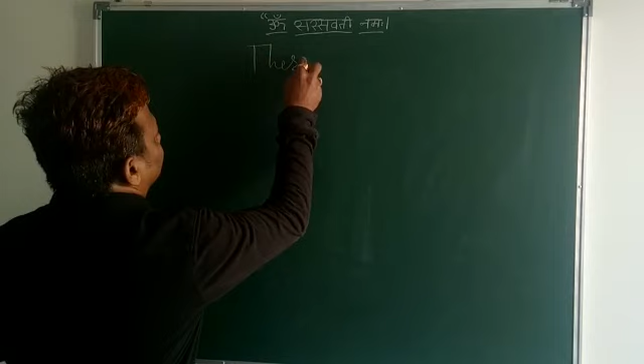Hello my dear children. Today I am going to discuss with you a very important topic in our physical chemistry part, that will be thermodynamics.

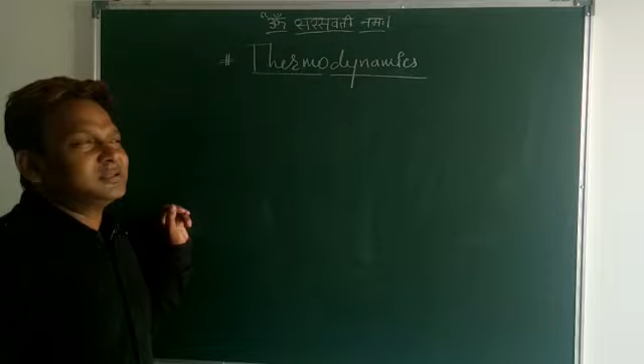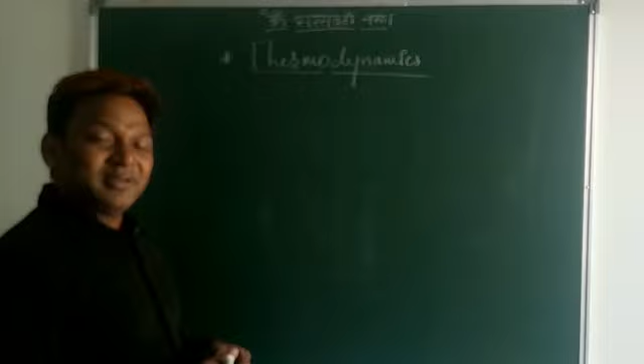And this thermodynamics we are going to learn in our chemistry, because everybody knows that thermodynamics in physics and in chemistry is somewhat different. If we are talking about thermodynamics in chemistry, we have to consider from system to surrounding. But if we are discussing thermodynamics in physics, we have to discuss it from surrounding to system. Some notation gets changed. So we are going to discuss this thermodynamics in our chemistry.

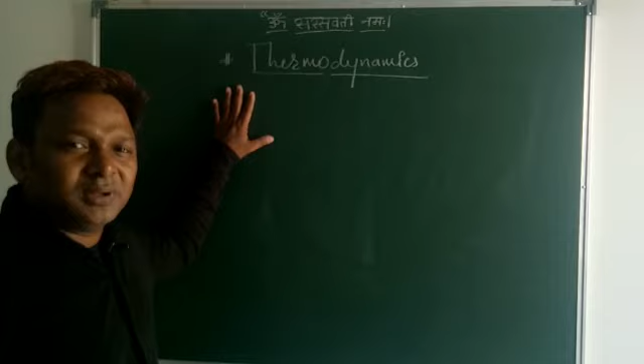And I want to cover all the parts, whatever is asked in this thermodynamics chapter, in IIT Mains, Advanced, even in NEET. So we are going to discuss about thermodynamics.

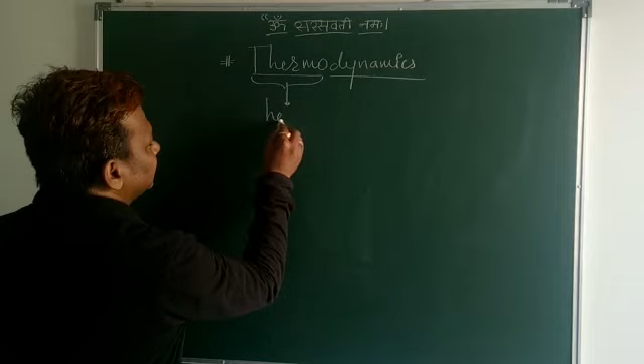First of all, this term thermo, if you want to check, this will be called as heat. Term dynamics, this dynamics means it will indicate movement, so motion. So motion of heat, movement of heat, also we can say this is called as movement of heat.

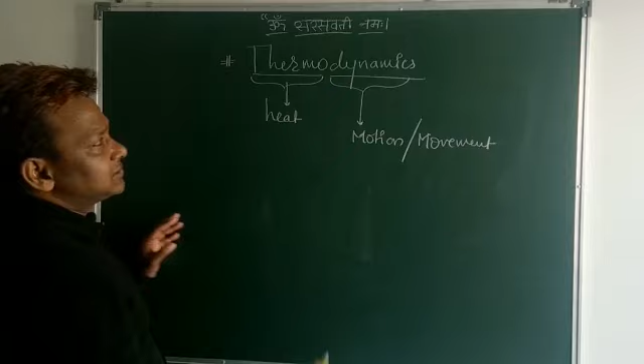Now this movement of heat, either it will take place from one part to other part and from other part to one part. So this exchange of heat, movement of heat, we are going to discuss in this chapter. To understand this chapter, some principal terms are there, some important terms related with this chapter.

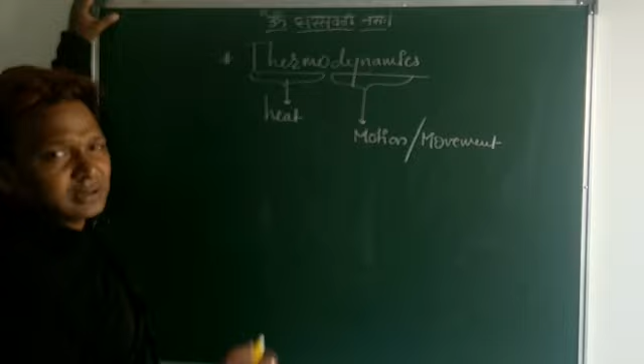And that will be called system. This is one of the most important parts, and the second important part in this chapter we are going to learn about is surroundings. So what is a system and what is a surrounding?

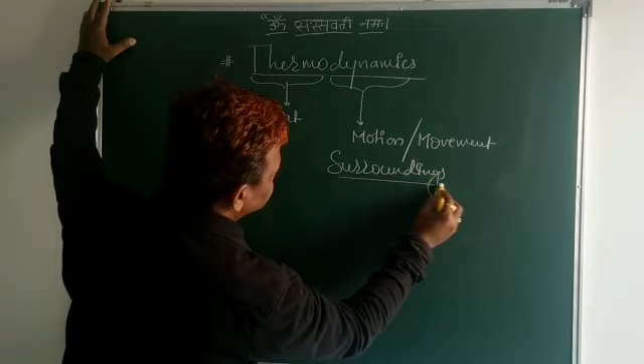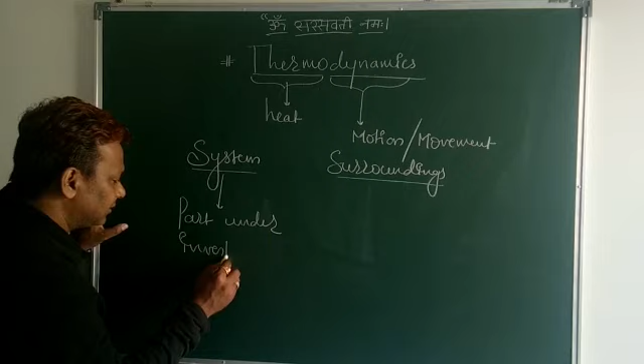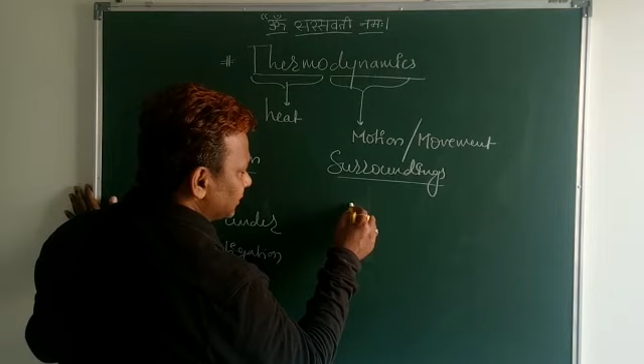Here, any part which is under investigation, the part which is under investigation is called a system, and other than the system, the part other than the system is called the surrounding. So I should say, a part other than the system is called a surrounding.

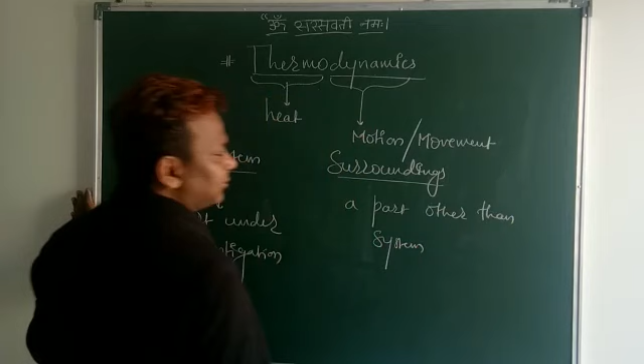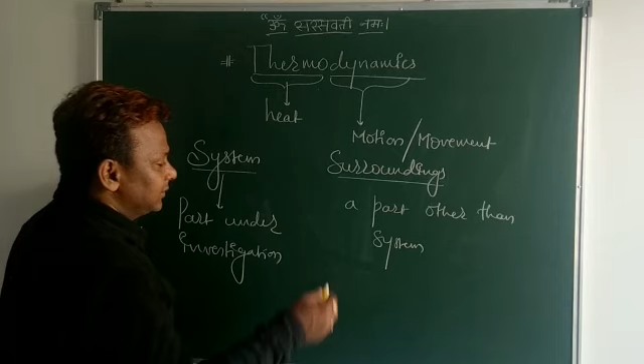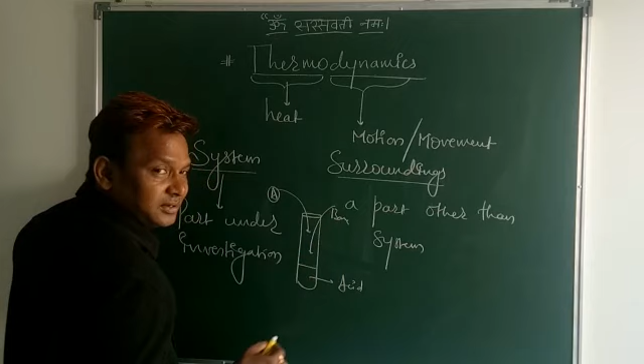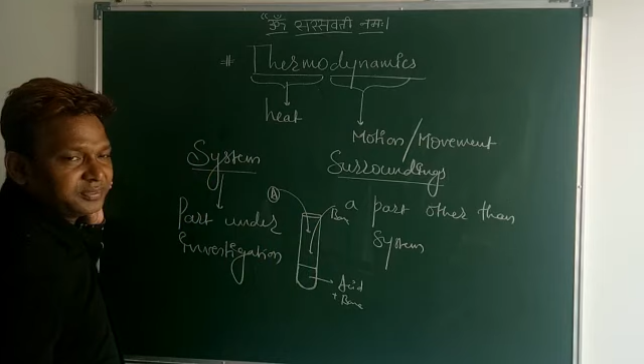I want to give some examples for this particular system and surrounding. Consider that we are in the lab performing some experiments, a chemistry lab. So we are considering a test tube, and in this test tube we have kept some chemicals. Let us say we kept acid, and we are putting in a base. Now reaction is taking place between acid and base and it forms salt and water. So what we are going to see is the reaction which is taking place inside the test tube.

So this complete test tube is the system for us, because it is the part under investigation. Means completely, the test tube is the part which is under investigation. So this will be considered as a system.

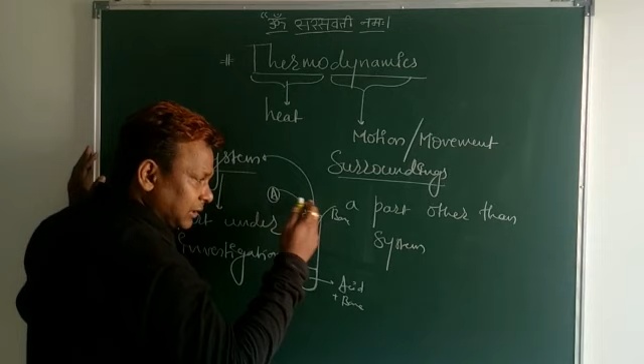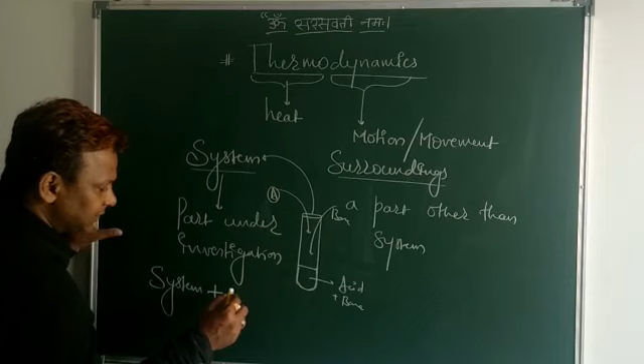But other than this test tube, the remaining part, meaning the complete part of the lab or that building, or that complete universe we can say, other than this test tube, the remaining all part becomes the surrounding. So one more very important point here: system plus surrounding makes it the universe.

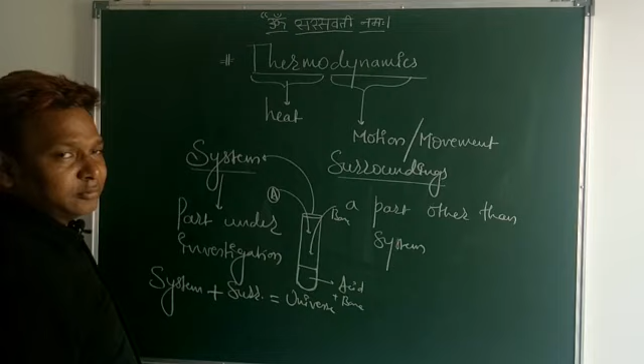One more example we can consider, instead of the lab. Suppose we are doing some work, let us say, I am doing work on the board. So this complete board is under investigation, so I will consider this board as a system, but other than this board, the remaining whole part becomes the surrounding. So it is a simple way to understand system and surrounding.

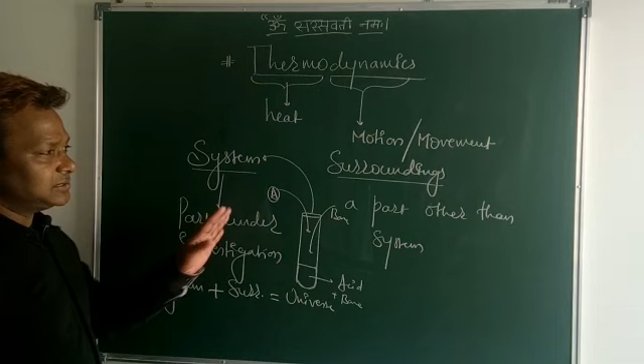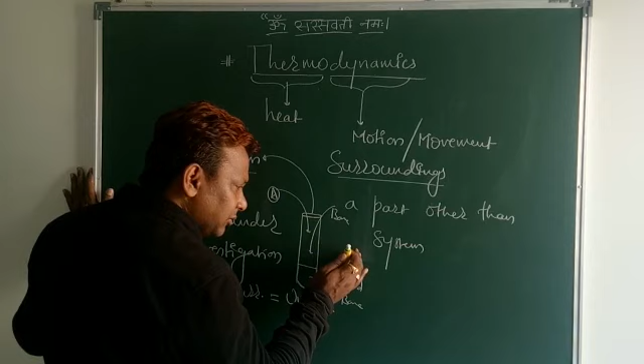But we know that if we are considering this test tube as a system and the other universe becomes a surrounding, then in between the test tube and the universe surrounding, we are having some kind of boundary. So all the system and the surrounding are having a kind of boundaries, and these boundaries are maybe either rigid, or real.

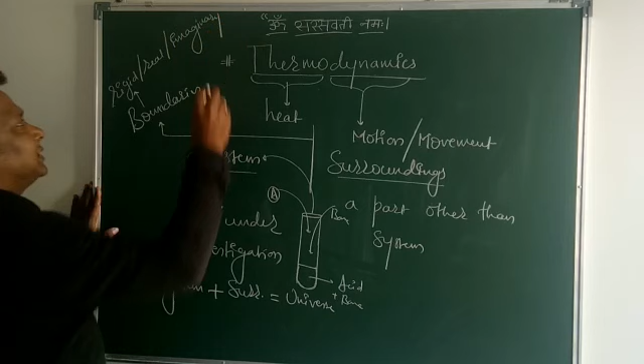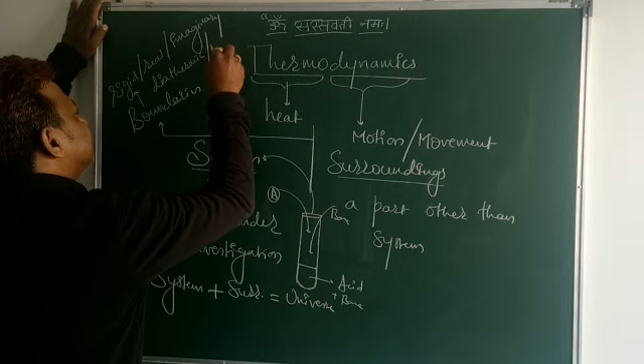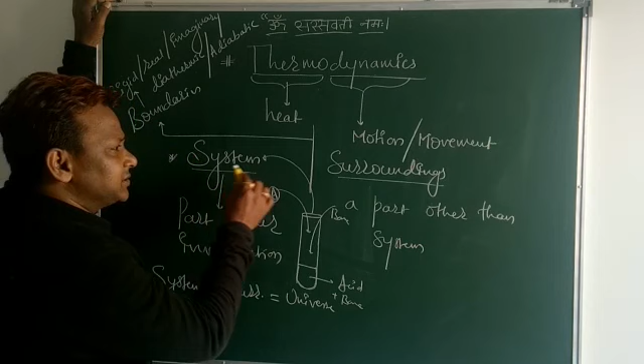Or it is imaginary, we can say rigid, real, imaginary, or it is diathermic, or it is adiabatic. So this is a very important point we are going to learn in this topic. The important terms are system and surrounding, and they should have a kind of boundary. This boundary may be a rigid boundary, real boundary, imaginary boundary, diathermic boundary, or adiabatic boundary.

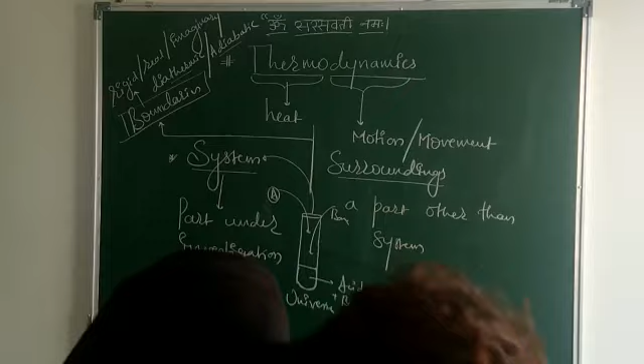What is meant by diathermic boundary and adiabatic boundary? The diathermic boundary means it is a boundary where exchange of heat will take place. I want to rub this part and explain this one. So these boundaries, if you are going to consider here as diathermic boundary, this is a very important term to remember again.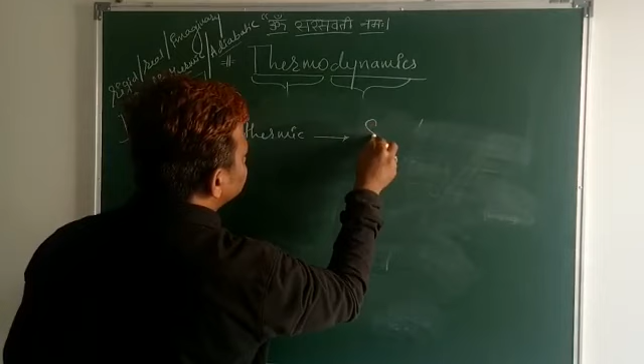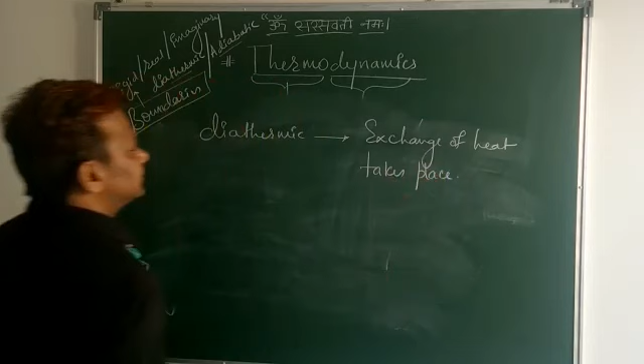Diathermic boundary means exchange of heat takes place. And adiabatic boundary means no exchange of heat takes place.

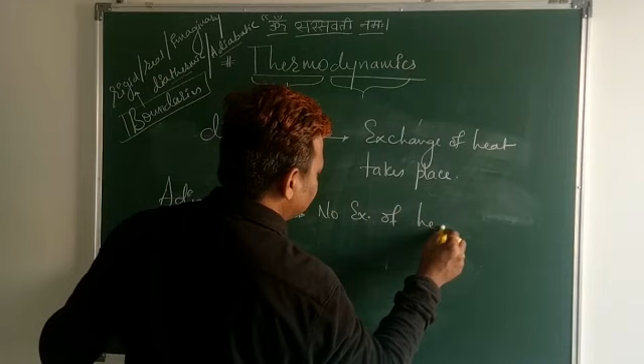So this is a point we have to remember. Boundaries may be diathermic or adiabatic. Diathermic is where exchange of heat takes place, and adiabatic is where exchange of heat does not take place.

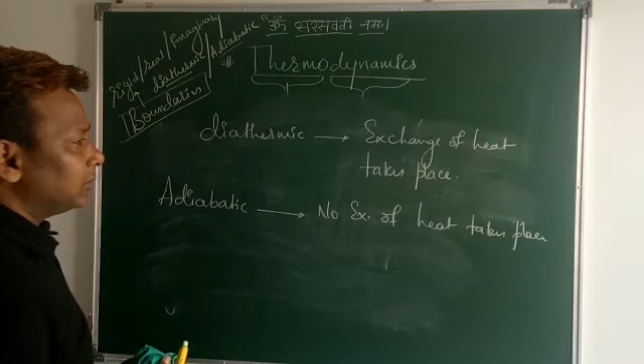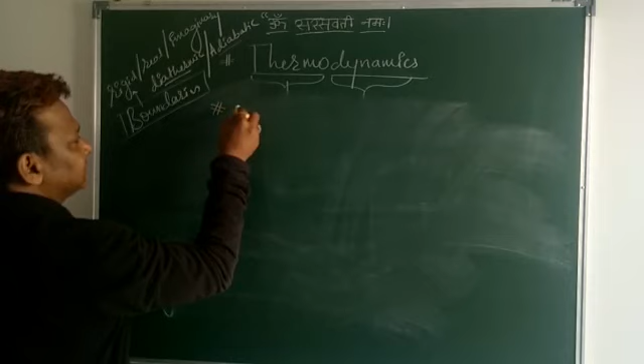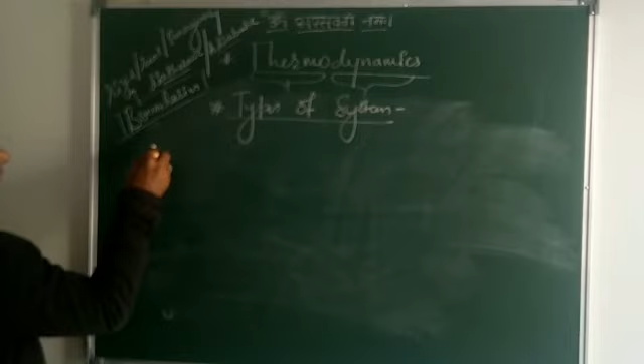So with this part about the system and surrounding, the further part we are going to see now is a system. So what is a system and what are the types of system? This is another topic in this chapter: types of system. These types of system are of three different types. The first one will be called an open system.

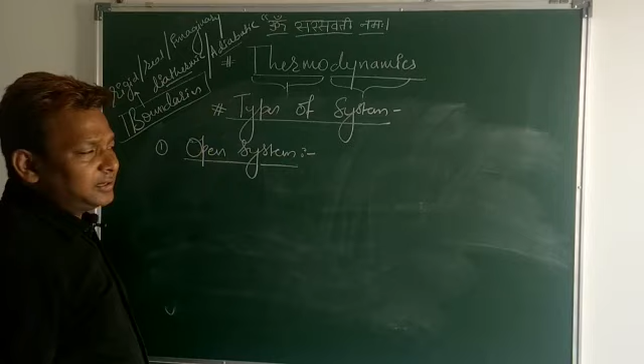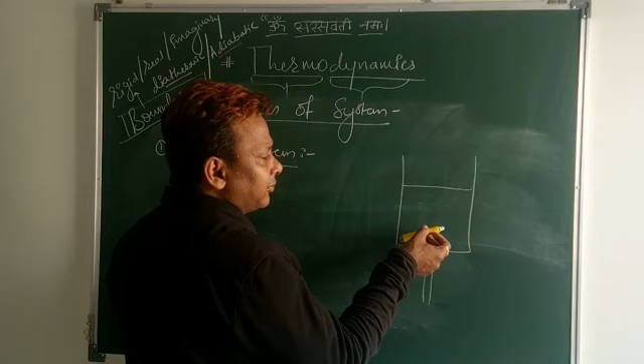Now I will tell you one example with a diagram. Suppose one vessel is there, and this vessel will contain water, and we are going to heat it. While heating, what will happen? Initially the water becomes warm. After some time, the water on the upper layer will start to evaporate. So in this system, what will happen here? Exchange of heat, that is energy, and exchange of mass, that is the water going to evaporate.

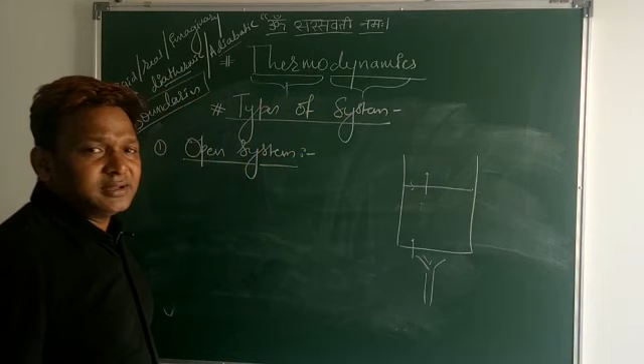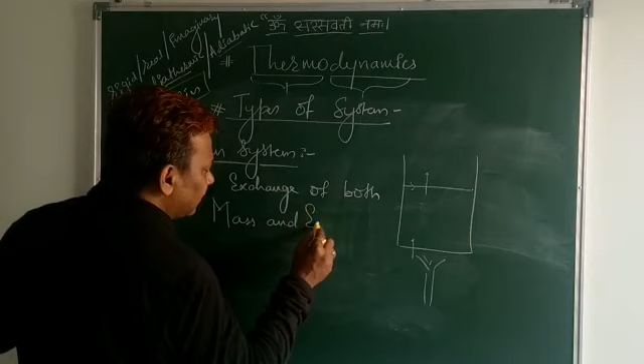So the system in which both means, I should say, the system in which exchange of both mass and energy takes place are called an open system.

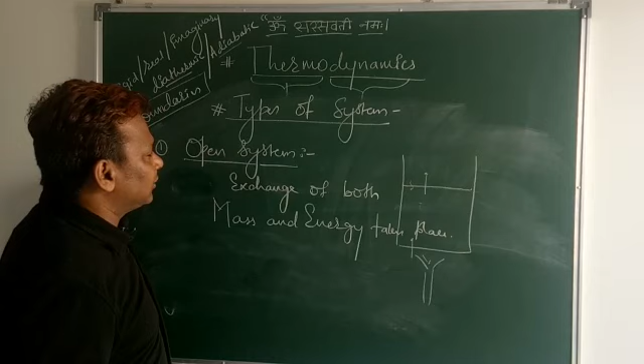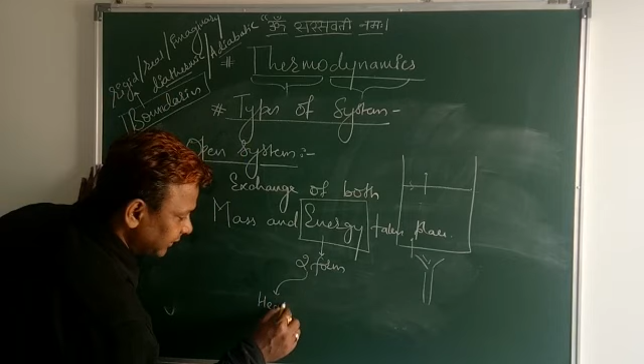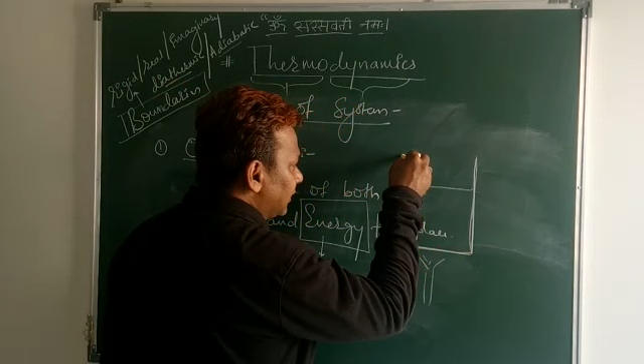But this point is very important. How does exchange of energy take place? Because exchange of energy will take place in two forms. The first important form will be called either a heat form or a work form. And for this exchange of mass and energy, the boundary which we are going to consider should be a diathermic boundary.

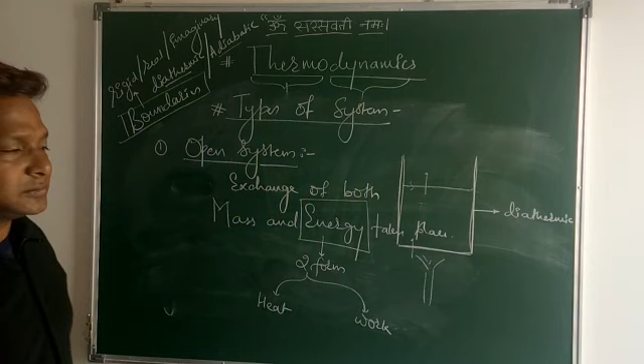If we are considering this boundary as diathermic, then only exchange of heat will take place. So it is a system in which exchange of both mass and energy takes place, and exchange of energy will take place in two forms. The first form is heat form and the other form is work form. So that will be called an open system.

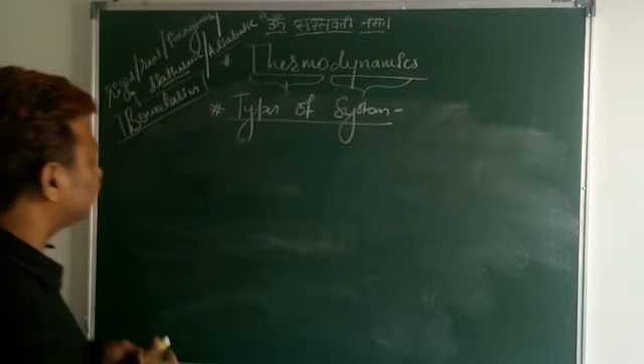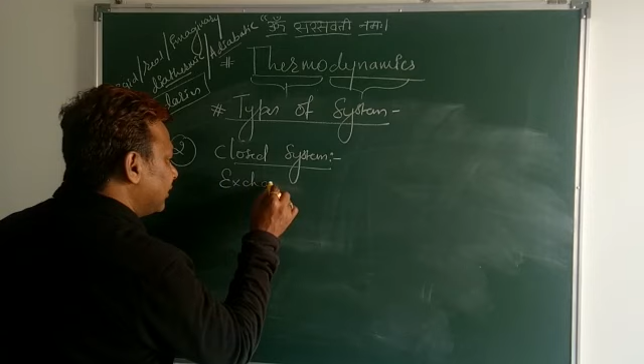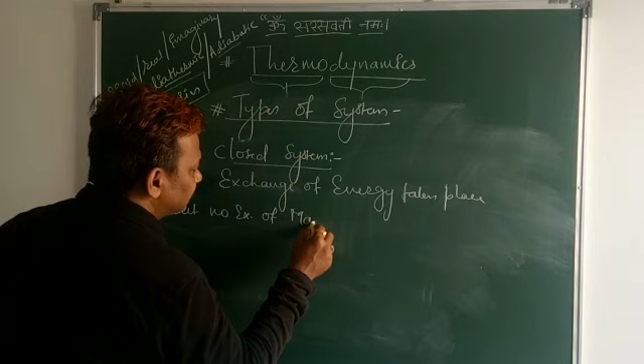The second part we are going to see is about a closed system. Now it is a system in which exchange of energy takes place, but no exchange of mass. Now let's go to an example of this closed system.

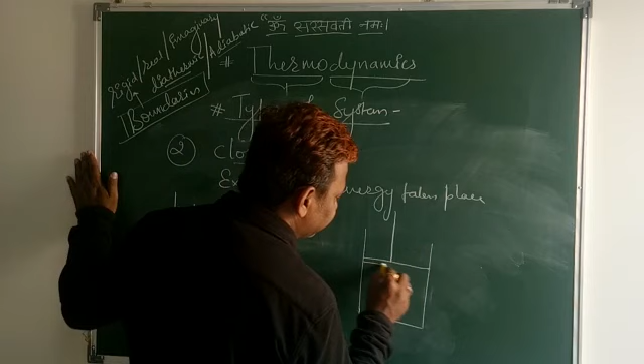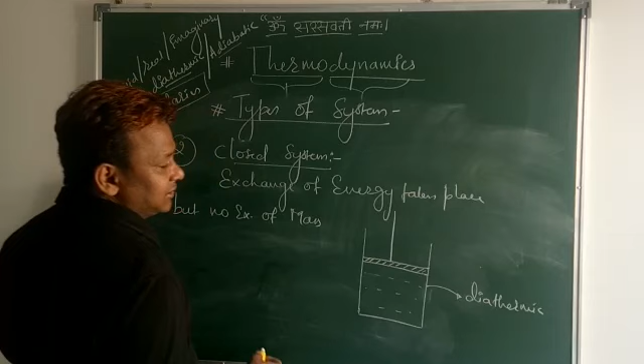Let us consider a vessel having a frictionless piston kept here. It is a piston, but it is frictionless. And the wall present over here is a diathermic wall, so obviously exchange of heat will take place. Now what happens here, in this case, this is a frictionless piston and it is a closed system. The content present here, maybe a gas, cannot go out, cannot liberate outside, or evolve outside. So there will be no exchange of mass.

But in this case, exchange of energy takes place. How? Suppose we are going to heat this vessel, and water is present here. What will happen? It will start to warm, then start to boil. The vapor will push this piston upward, pushing the piston outward, but the content present in the vessel does not liberate outside, does not go outside. So there will be no exchange of mass, but by pushing, the piston will move up. Meaning in this case, exchange of energy takes place.

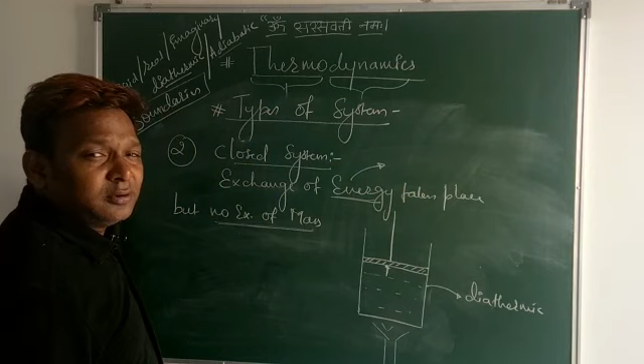But did you notice? I told you exchange of energy takes place in two forms, heat form as well as work form. In this case, these vapors are pushing the piston upward, meaning exchange of energy takes place. But in which form? Either heat form or work form. So my answer is that exchange of energy takes place in work form here. So this is the second part, the closed system.

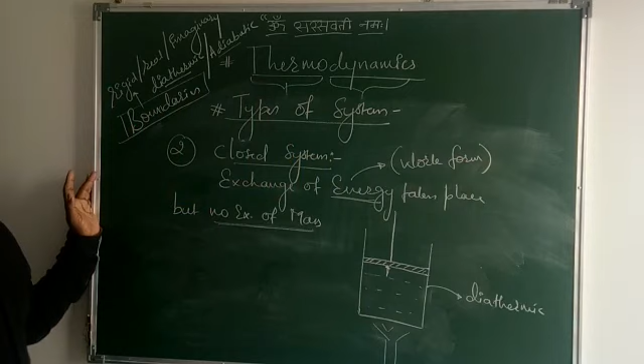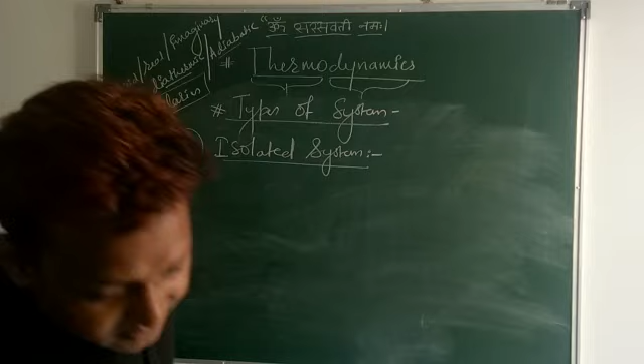Now let us come to the third part, the isolated system. It's very important and simple compared to this part. The third one we are going to see is the isolated system. This is an isolated system: it is a system in which no exchange of mass...

...as well as no exchange of energy, because it is a closed container, and the wall present over here is an adiabatic wall. The wall we are going to keep here should be an adiabatic wall, and from this adiabatic wall neither mass nor energy gets exchanged. So this is called an isolated system.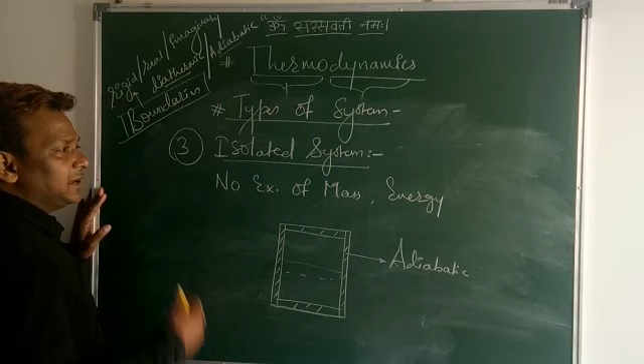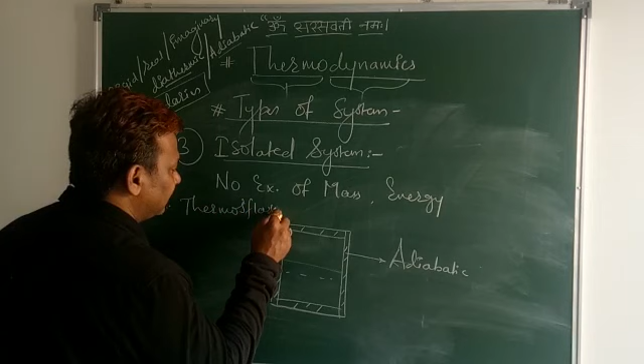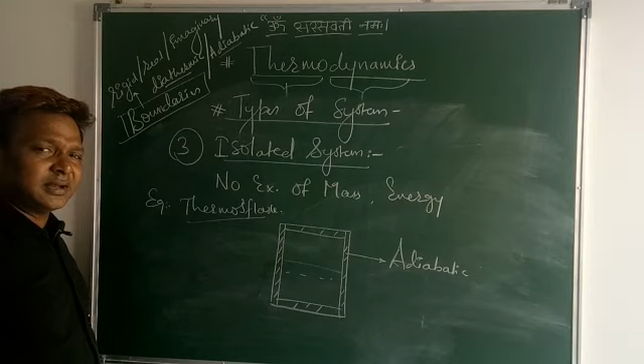Our example is the thermos flask. For this kind, we can say the example is a thermos flask, where no exchange of mass as well as energy takes place, but only up to a certain time, because once the time limit passes, definitely transfer of energy will take place. So better we can say, for this part, the example is a thermos flask. So these are the three types of systems in our syllabus that we had to discuss.

Now the second part: in this one we are going to discuss about variables, that is thermodynamic variables. We can also call them thermodynamic parameters or thermodynamic properties. There we are going to discuss some properties called extensive properties and intensive properties. I am going to discuss that part in my next video. Thank you very much.